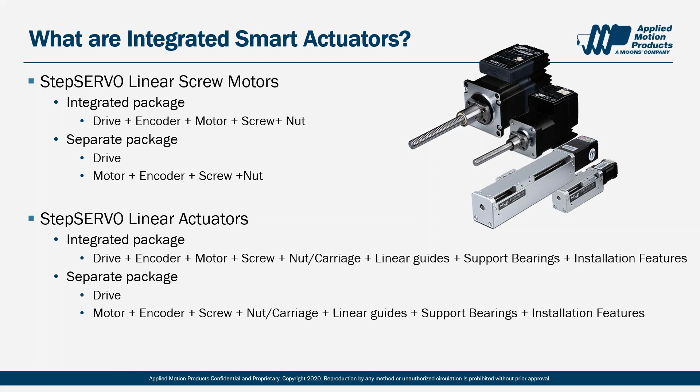On top of that, we also have a linear actuator type, which includes additional features such as object carriages, linear guides, supporting bearings, and some other installation features. Depending on your application, each of these products is suited differently.

In a traditional way, when you try to motorize an object, there are a couple of things you need to think about before you start: what am I going to automate, how am I going to attach to my object, how fast I want to go, how long I have to be going, what kind of motion I need to control these axes, and how am I going to move that.

This typically involves a motor and a drive, and often depends on the motor type, accuracy, and capability of the motor. Once you figure out all the motion parts, then you have to think about the fixtures, the linear screws, and how to put them together as a package. This often involves mounting patterns, shaft couplings, and so on.

Once you have all those figured out, you have to run your system and test them to see if that actually works. Finally, you need to think about how to replicate the system quickly and turn that into a production process. During this process, you might also have other considerations, such as cabinet space, cable management, size of the motor, size of the screw, how you're going to put them together, any bearing support needed, motor drive configurations, and even encoder calibrations.

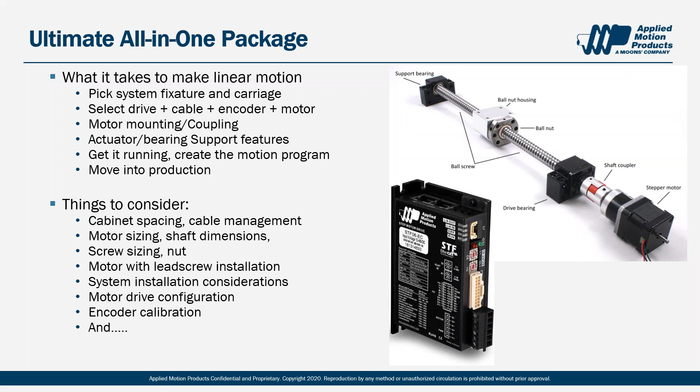And the list just goes on and on. So this is our solution. As you can see from the pictures, the unit involves fewer parts. All the parts on the previous slides are kind of put into one single package.

Compared to the conventional type of solution, all the critical motion components are there - the driver, the motor, encoder, screws, and nuts, and so on. However, all the linkage components, such as the mounting plates, the couplers, the cables between the drives and motors, are kind of gone. Similar situation goes to the actuators - the carriages and the supporting features are all built into that small actuator right there.

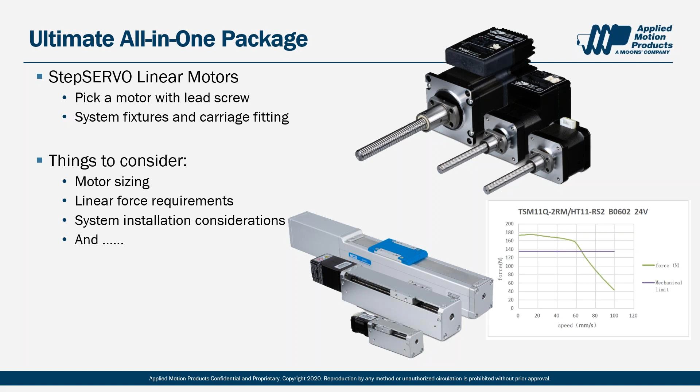And more importantly, that actually changes the way you purchase. You have fewer items to consider. If you talk to us, what we do is, based on your motion profile and load requirement, you will see a push force curve from us. It looks like the one on the right-hand side. Then we pick the motor and screw combination for you based on your requirement, and then that's pretty much ready to go.

So before we dive into all the details about linear motions, I just want to touch base on StepSERVO technology. Jeff Kordik, our CTO, did a great presentation a couple weeks ago about this technology. I won't go into too much detail of that, but overall, StepSERVO is going to boost your performance on your linear applications because of its capability.

So first of all, it is more power. You will get 25% more torque out of a similar motor package, and peak torque is also available. Secondly, the control resolution from the StepSERVO motor is 20,000 counts per rev, which means if you have a 2mm lead with this amount of control resolution, your command position can be as small as 0.0001 millimeters.

In good situation, also servo-like control experience will allow you to not accumulate position errors during the operation of the system, and also it becomes less load dependent on your axis. High-speed operation also becomes available because traditional stepper motors run from 5 to 15 RPS, whereas StepSERVOs go as high as 50 RPS.

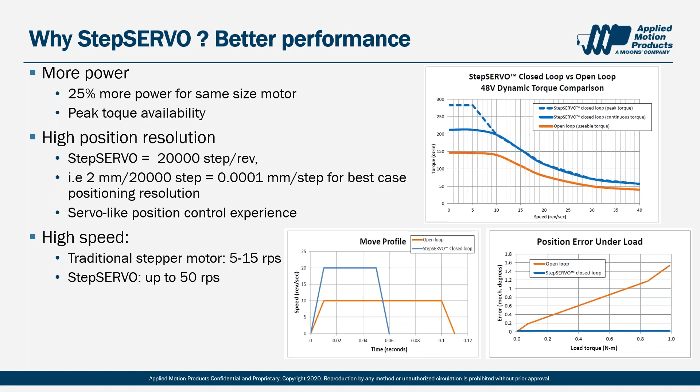Apart from the performance, it is better life for your motion axis. The great thing about StepSERVO is, again, it's closed loop control, so it results in a more efficient system. Less current goes into the motor, meaning less heating from the motor, and in turn you can run the motor longer with a higher duty cycle. Less current in the motor also means less noise and vibration during the phase changing of the stepper motor.

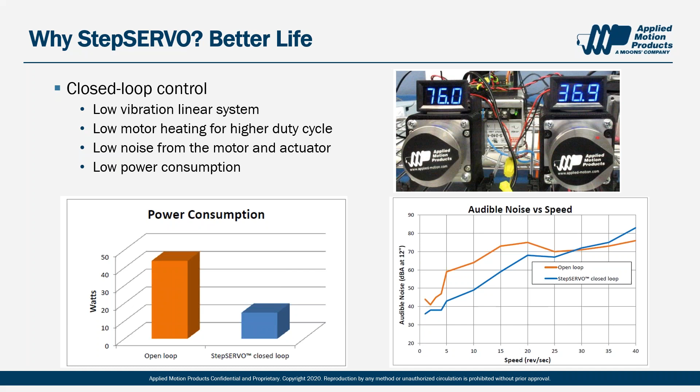Imagine you already have a ball screw on the system - the screw is making so much high-pitched noise. Adding the stepper motor noise, it's not very pleasant to hear. Less vibration also means less damage to the screw and the bearings, so that will increase the lifespan of your actuator. And finally, less power consumption is always very welcomed by any type of battery powered system, for example an AGV car.

And finally, StepSERVO motors with closed loop don't really stall out because the encoder will always try to bring the motor back to position. Also, StepSERVO motors have other features like hard-stop homing, where sensors can be eliminated from your actuator. And more recently, we introduced TruCount absolute encoder motors, specifically designed for this type of purpose.

Product selection-wise, you guys probably already know we have a wide variety of products for linear applications, NEMA size 11 all the way up to size 24. And we have various control options, from I/O control all the way up to field bus and internal programming.

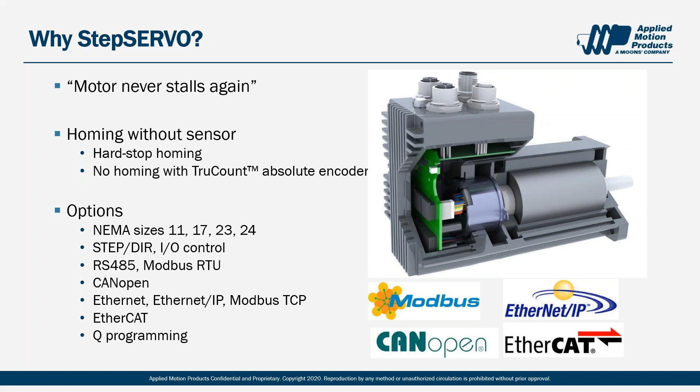So back to the topic of linear. When you select a linear system, one of the most common questions I get asked is, do I need a ball screw or do I need a leadscrew system, and why? A lot of assumptions are made that ball screws are more expensive, they are stiffer, they provide higher accuracy, so they are actually better for me. But in some cases, it's very application dependent, and we will go through some of those.

In general terms, the basic difference between leadscrew and ball screw is that the ball screw uses ball bearings to eliminate the friction between the nuts and screws, whereas the leadscrew doesn't have that. The rolling nature of the ball screw eliminates the sliding friction associated with the leadscrew, which brings you smooth motion and a more efficient system. Looking at the graph, you can see ball screw is over 90% efficiency, whereas the leadscrew system is roughly around 30% to 70%, depending on your product choice.

With the low friction of the ball screw, it allows the ball screw system to go higher on speed, higher duty cycle for your applications. As you can see, 15 RPS for a typical leadscrew, ball screw 50 RPS.

Since ball screws have a stiff nature, they offer higher accuracy and higher repeatability, and they allow for a longer lifespan. However, because ball screws have metal-to-metal contact, the noise level is generally pretty high.

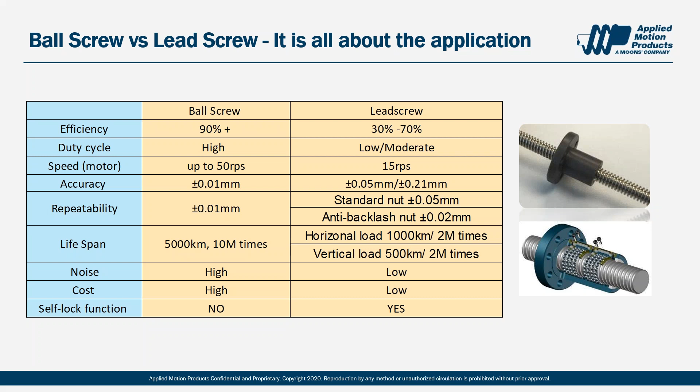So when you're working in an environment where noise is not welcome, leadscrew is actually the better selection. Cost-wise, leadscrew systems are a lot cheaper than ball screws. Therefore, if you have a system where the actuators can be easily replaced, leadscrew may be the option to go with. And finally, leadscrew offers a self-locking function which is not available from the ball screw, and it's very beneficial for any axis that's vertical or where a holding force is needed.

So what is the difference between repeatability and accuracy? In a linear system, accuracy means the degree to which the final position matches the commanded position, whereas repeatability means the ability to return to the same position multiple times under identical conditions. A system can be accurate but not very repeatable, and also can be repeatable but not very accurate.

So how can I make it better? Accuracy can be improved by having an optimized drive and motor combination. Remember a couple of slides ago we talked about step servos with high control commandable position - that would definitely help with accuracy.

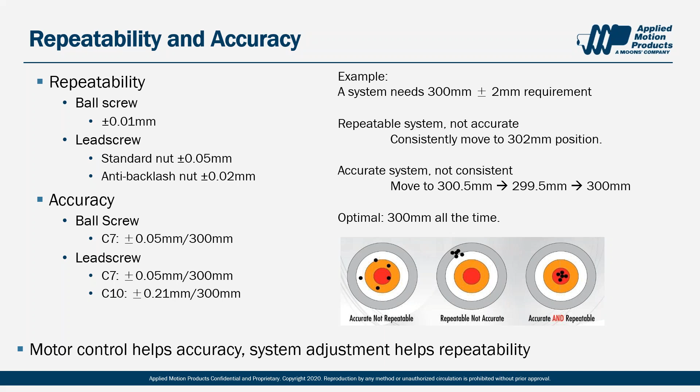But on the other hand, repeatability has more to do with your mechanical setup. If you have an anti-backlash nut, or if you're using a ball screw, it will already help a lot. Other factors to consider are temperature change and the material of the screws, if there's any expansion or contraction going on during operation.

So how much force do I need for my design? That really determines your product choice for your system. The maximum speed of the linear motion is determined by the maximum rotary speed allowed from the motor times the lead of your screw.

For example, if you use a 2 millimeter lead and the motor can run as high as 10 revs per second, your linear speed is going to be 20 millimeters per second. Then you will look at the maximum allowable force from the motor and screw combination. Using the graph example I have on the chart, it is a TSM 11 step servo motor with a 2 millimeter lead and 6 millimeter diameter ball screw operating on a 24 volt power supply condition.

As you can see, there are actually two data curves shown. One of them is the maximum push force allowed. So for TSM 11 with this type of lead, you get up to 180 Newtons of pushing force at a speed around 20 millimeters per second.

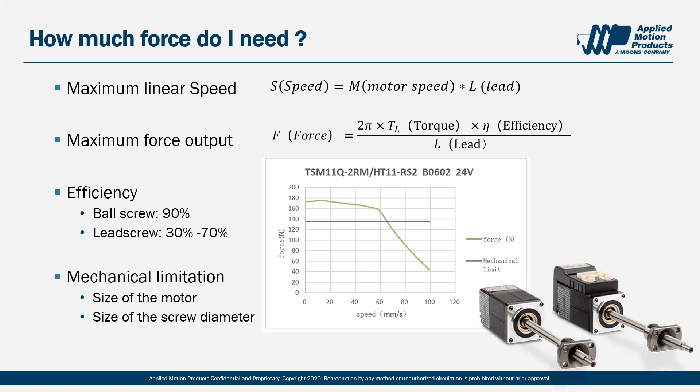Lead screw has this nature of self-locking function. It comes from the nature of less efficiency and the larger friction from the lead screws. When the coefficient of friction is greater than the tangent of the lead angle, the lead screw will lock itself.

This is a great feature for any axis where holding position is needed. It eliminates the need of a brake, an external brake, or any type of holding device to sustain the load while they're in position. For a ball screw system, you might need to use a brake, and that also means you need extra components, additional wirings, and certain control mechanisms for this purpose.

With that said, not every single lead screw will have the self-locking function. For Applied Motion screws, if you pick a lead that's less than or equal to 1/3 of the screw diameter, the self-locking function will exist. For example, if you have a 2 millimeter lead with a 6 millimeter diameter screw, there will be self-locking function. The force of the locking can be calculated based on the formula shown on the chart.

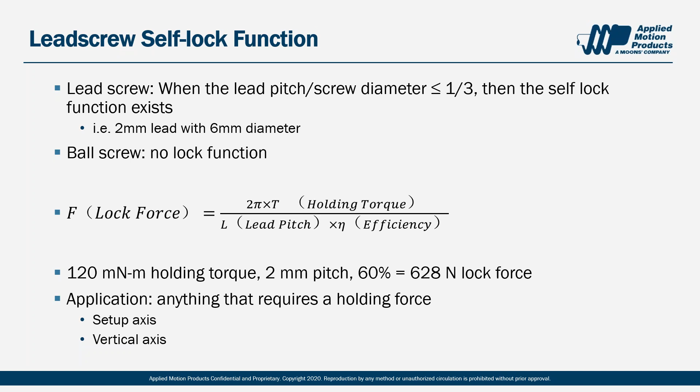So a TSM11 with 120 millinewton meter of holding torque, you will get roughly around 628 Newton lock force. It is great for any type of setup axis or vertical axis.

Product offering wise, Applied Motion has both ball screw and lead screw options, integrated units and separate systems, step servos. We offer leads from 1 millimeter to 20 millimeter in pitch, up to 500 millimeters in travel length, 300 Newton push force, and other options like nut size, different nut shapes, and supporting varying features are also available.

What happens if you need an open loop stepper motor? We also have that. Feel free to contact us and we can talk about it.

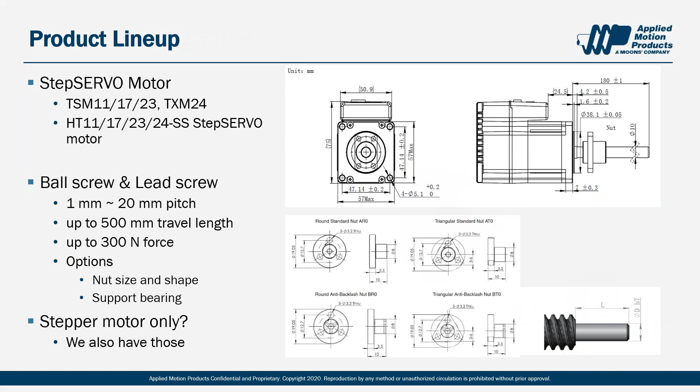Now I'm going to talk about some application examples using either a ball screw or lead screw system. In this case, the customer tried to design a position table for a CNC type of machine. This involves 4 to 8 axes per table for this particular application, with multiple positioning control required.

For the customer, they actually need 120 Newtons of push force, and they only want to run at a lower speed at 10 millimeters per second.

Once the position is in place, the CNC cutting will be working, whereas the axis was just holding the load. So it is a very low speed movement, the duty cycle is not very high, and they do actually require that self-locking function. So lead screw was our choice.

I actually picked the 1 millimeter pitch for them, so that it allows a holding force up to 1,000 Newtons, which is great for the system.

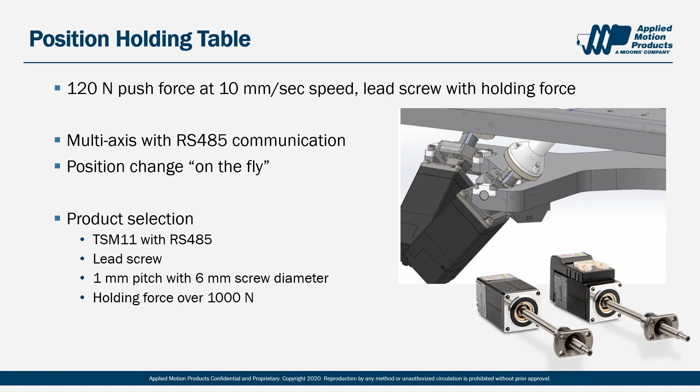In addition, the TSM11 uses RS-485 for positional commands, and it can actually change position on the fly. Also, they can daisy chain all 8 of those axes together, which is great for the application.

Factory grippers or laser cutting heads also get a lot of benefit by using integrated units, but in this case, ball screw will be the product choice. In a typical application like this, the movements are very frequent and very small. Also, the speed can be pretty high, depending on how fast the customer wants to move it.

During operation, it's very unlikely they will shut down the axes, and the holding position is not very much needed. Low motor heating is one of the requirements, because the system can get heated pretty quickly if you are using an open loop stepper motor. So StepSERVO motor was their choice there.

On the other point, because of the low vibration nature and the wider range of speed for the laser cutters, it actually makes a higher cutting quality for the customer.

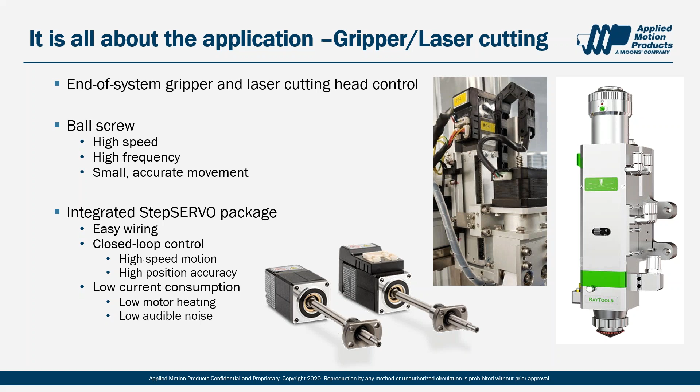Safety feature wise, this involves travel limits, and sometimes even a safety sensor, and they actually just directly mount them to the backside of the motor, which really helps with the wiring for the customer.

3D printers, it's a linear application. It is definitely a fast-growing industry in the past 10 years. It started with a traditional XYZ gantry kind of system with all lead screws. They are cost-effective, and normally they use a higher lead for high-speed requirements. I would say the accuracy is within their acceptable range.

However, as the industry moved forward, the product offering became more specialized towards certain customer needs. For example, a consumer type of product still wants compactness, and they focus more on the quietness of the system, not so much the accuracy. So lead screw is still the optimal choice for them.

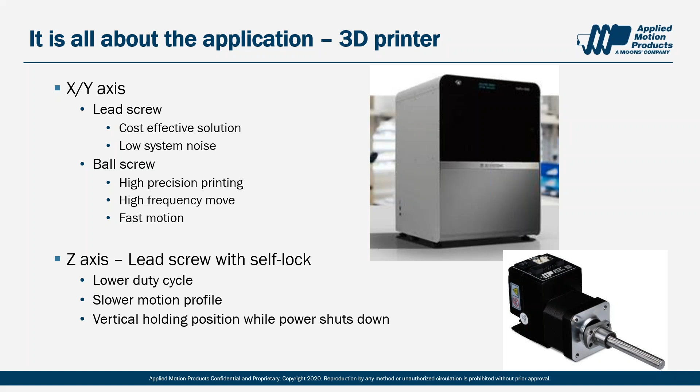On the other hand, all the commercial and industrial focused printers want higher speed for prototyping, and they want high precision quality for the printing. In that case, some customers started choosing ball screws for the XY axis, while still using the vertical axis with a lead screw, because it is lower duty cycle and the holding purpose is well utilized.

Automated setup axis is one of the bigger topics for factory automation industries right now. Historically, when the production cycle ends, factory workers have to come in and set up each of those axes according to the new production requirements. It's very time consuming and tedious. In some cases, customers say the setup time is even longer than the actual production time.

A Leadscrew with a TXM24 integrated package is an optimal solution for them. It has internal programmability, field bus control if needed, and since it's an integrated unit, it's completely out of their production tooling cabinets. The speed is relatively low and the frequency of travel is not very often, so Leadscrew is perfect for them. Plus, they use the self-locking function to hold in place.

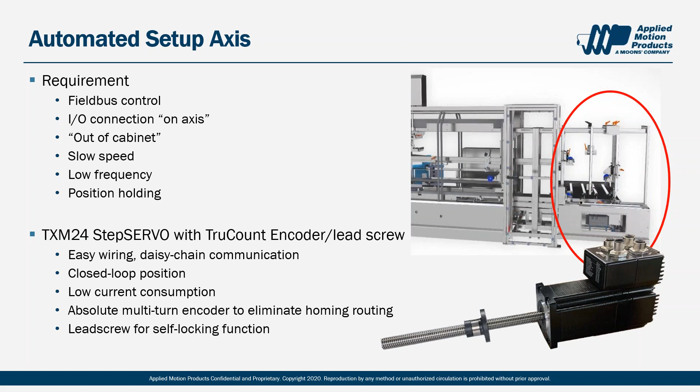Recently, we also introduced the TruCount absolute encoder, so homing becomes an unnecessary process for some customers, and that's a very welcomed feature by these industries. Also keep in mind, a closed loop StepSERVO system, even left on during production, doesn't consume a lot of current, because to keep the control units going, it only requires less than 0.1 amps.

So smart actuators - we combine the screw and the motor and add additional features such as the carriage, linear bearing guides, and other installation features. For applied motion products, our focus is on the miniature size of the actuators, because that's where compact becomes very critical.

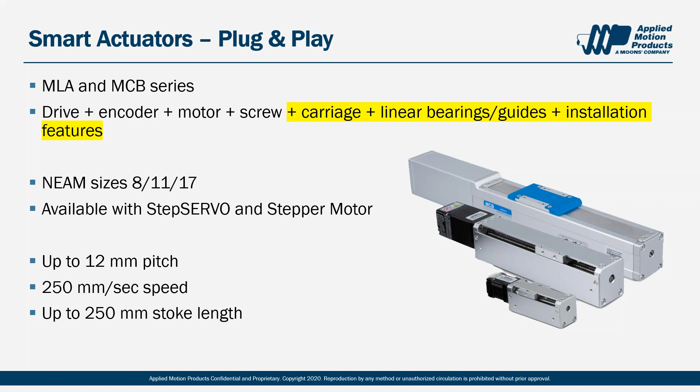Our main product line goes as small as NEMA size 8 all the way up to NEMA size 17, available on both StepSERVO and stepper motors. Typical pitch size is 1 millimeter up to 12 millimeters, and the stroke length up to 250 millimeters total.

Our design philosophy for these smart actuators is compact and convenient. First, we minimize all the linkage and supporting components by removing the couplers and designing in bearing support features, integrating the carriage with the nut, maximizing the usable stroke length available. As you can see from the drawing, the total length of the actuator is the motor length plus only 58 millimeters for the carriage, and the rest is all available travel stroke.

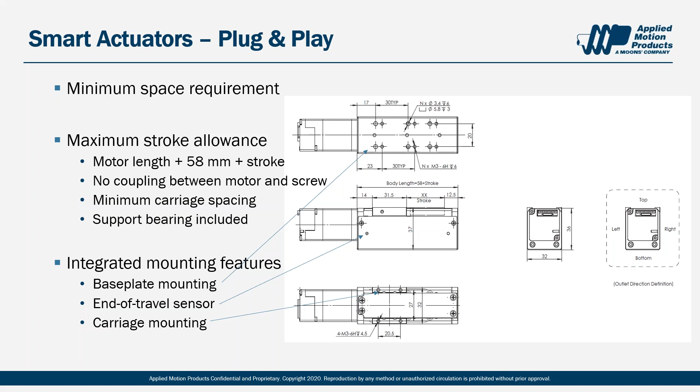Secondly, we try to minimize the side spacing around the actuator. That's why in this drawing, the motor and actuator look almost in line, like a tube, because it requires less side spacing from your system. In order to provide more convenience, we're designing all these installation features. We have threaded holes for base plate mounting, travel sensors, and multiple directions for carriage mounting.

The point to consider when building an actuator system is similar to choosing a screw. On the side is a demo unit I built for self-education and demonstration purposes. During this process, I first pick, based on the duty cycle, whether I need a ball screw or lead screw. Then based on force, speed, and length requirements, it all goes into that product selection process.

On the other hand, there are other factors to consider. If you look at the y-axis, it involves a large hanging weight on the side of the actuator, so I put a supporting guide rail on the other side to counterbalance the weight load. The z-axis doesn't have too much hanging force - it's pretty close to the actuator, so I utilize the side mounting features and top mounting features together to mount the NEMA size 8 actuators.

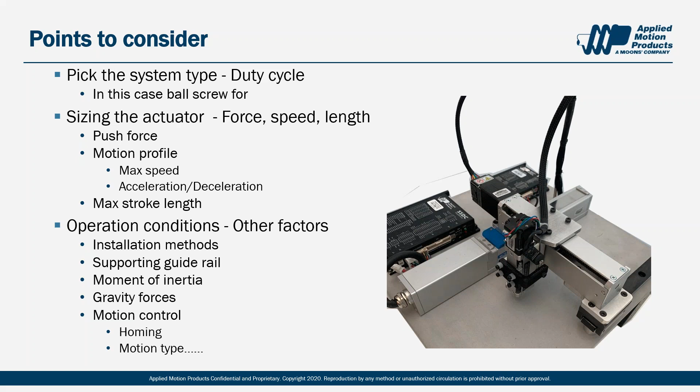From a wiring perspective, the miniature NEMA size 8 motor is an open loop stepper, so I put sensors directly onto the actuator. For the two smart actuators, I use the hard stop homing function, and they use encoder positioning for control, so there's no sensor needed for those two axes.

When you're designing an actuator in your system, the direction of the load and the mounting of the load plays a critical role in terms of product selection. One of the big reasons is the moment of torque. Depending on your system direction, the torque can be completely different.

Let's use the example on the right-hand side. When the object is hanging out of an arm on the side of the actuator, and when the actuator starts moving, there's at least three types of moments associated with this motion: the moment of tilting, the moment of gravitational force, and also what I call the rotation of the arm, which is also a moment.

So the goal is to design a system where you compare the ratio of each potential moment torque to the maximum allowable torque force, add them up, and they have to be less than 1. Then your system most likely is fine.

So what happens is there's a couple of ways you can either counterbalance the weight, or provide a support on the other end of your object to counterbalance the moment. As you can see, if I put a guide rail right underneath that blue box there, it will take care of the tilting, the gravitational force, and also the rotational moments.

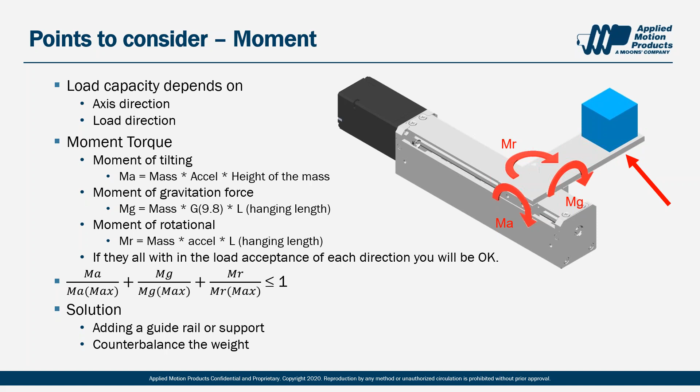Couple of examples on the applications. The mini actuators are great for systems where space is limited, but an engineer doesn't really want to work too much on designing a screw system. They want to make it easy and ready to go.

So we have multiple applications in inspection or vision systems. One application example I put here is for phone and tablet touchpad testing for both design and production process. The actuator moves to different sides of the touchpad and touches on multiple positions to see if they actually perform the same.

One great advantage you get from the StepSERVO motor is the torque control capability. Because with the newer generation of touchpads, all the phones and tablets allow a pressure sensor control. So with that in design, the TSM11 will push down with a certain amount of torque force and a certain amount of holding time to test exactly that function.

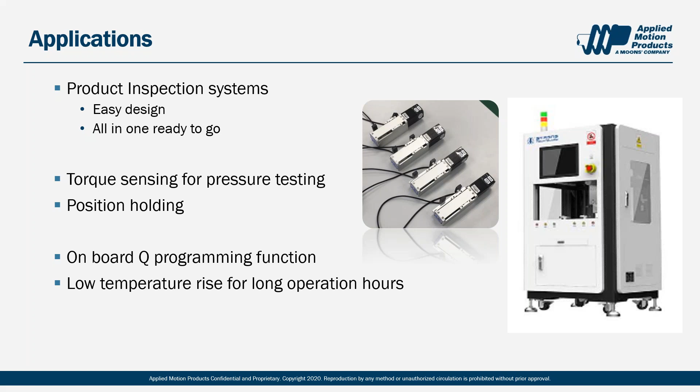In other business cases where a customer has a bigger system, it involves a lot of moving parts. So we actually help them select if a screw motor or actuator is more suitable for that particular axis. Let's use semiconductor equipment as an example.

In an inspection machine, it normally involves camera movements, alignments, focus, and product insertions, and so on and so forth. So for the base plate, the TSM23 with the ball screw is great because the weight is heavy on top, and they can design their own guides on both sides of the plate to make it evenly supported.

And for the y-axis selection, TSM17 was a choice because it's marginally reduced in load weight and also the size of the load. For the z-axis, they like the NEMA size 8 because it's very small, the camera is light, and it's a very minimal space requirement.

And NEMA size 11 motor is actually perfect for wafer carrying, again because wafers are pretty light in weight and the space is really tight. For all these axes, they're all talking Modbus RTU, they can all be daisy chained, they all work on the same DC bus voltage, and that was one of the great choices for our customer.

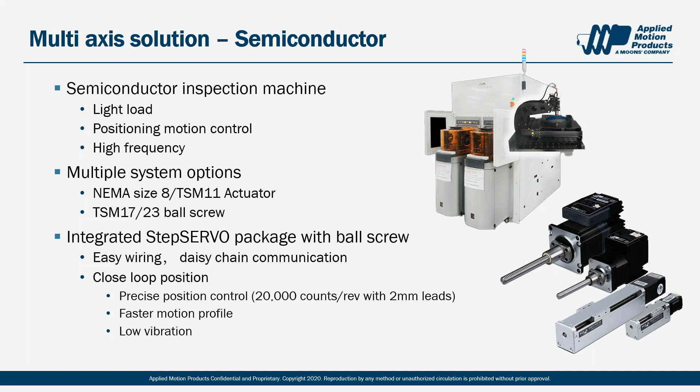Similarly, it goes to multi-axis life science or lab automation. The loads in general are not very heavy and they need high position accuracy controls. Operation spaces are very tight. A clean room kind of environment is always needed for the handling. So we design our system with a combination of rotational motions and linear motions.

So how do you approach us? With the combination of an integrated motor and a linear stage, the variation of products can be huge. I think the best way to approach Applied Motion on these products is talking to our regional sales manager, talking to our application engineers. We will define the motion solution together.

We do the product selection together. Then we prepare a drawing for you. We talk about the commercial decisions, and finally we deliver the prototyping products based on the choice. And then once everything passes your test, we are ready to go into the production cycle.